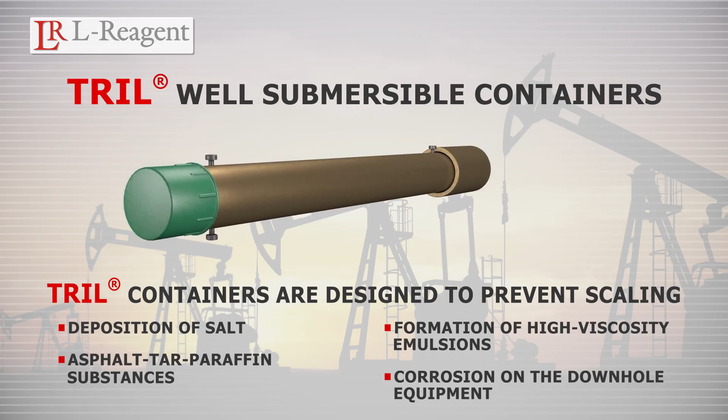Our products are Tril well submersible containers with inhibitors for treating oil wells. Tril containers are designed to prevent scaling, deposition of salt, asphalt, tar, paraffin substances, formation of high viscosity emulsions, and corrosion on the downhole equipment of producing oil wells in the process of oil production.

The Tril well submersible container is a device that performs efficient inhibitor dosing at required concentration for eliminating problems in oil wells. The Tril container is a universal device that can operate in wells with any operational parameters.

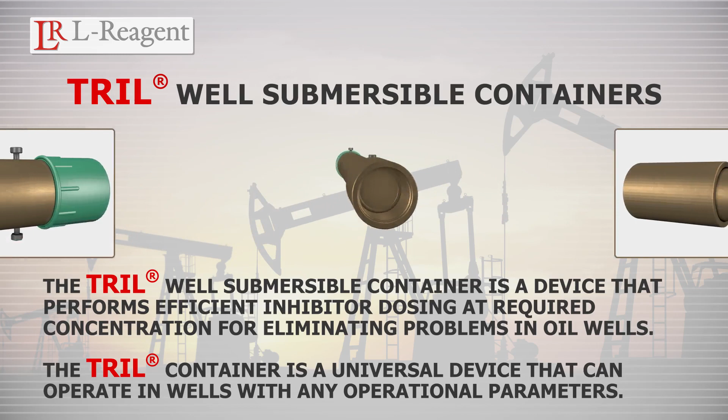A distinctive feature of its design is that container sections are equipped with a dosing adjustment mechanism, which allows you to customize it individually for parameters of a well within 10 minutes prior to running down the hole at workovers.

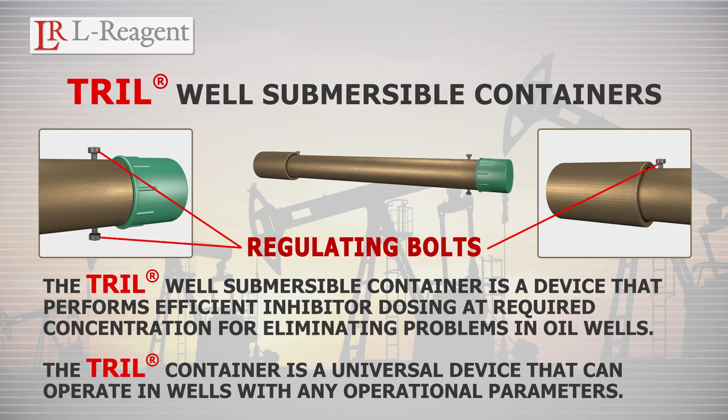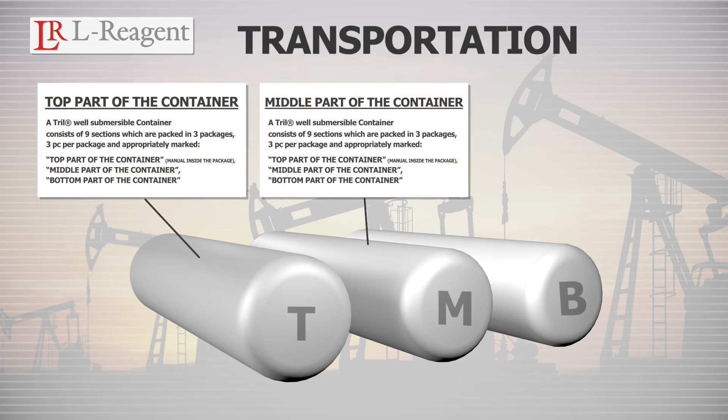Transportation. One Tril container is placed in 3 packages. Each package is appropriately marked: top part of the container, middle part of the container, and bottom part of the container. The operational manual is placed in the package with the top part of the container.

The weight of the package is approximately 60-65 kilograms, or 133-143 pounds. Each package contains 3 sections of the container. One whole container consists of 9 sections.

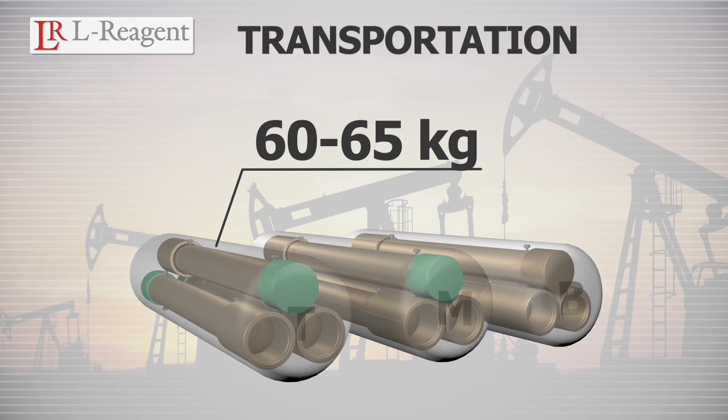For the convenience of transportation and loading and unloading, Tril containers are delivered on pallets. Up to 5 containers may be placed on one pallet, or up to 15 packages.

Order of assembly. The container is delivered disassembled in 9 sections. The sections are filled in with inhibitor. The container is assembled directly on the well side, starting from the bottom section and all the way up to

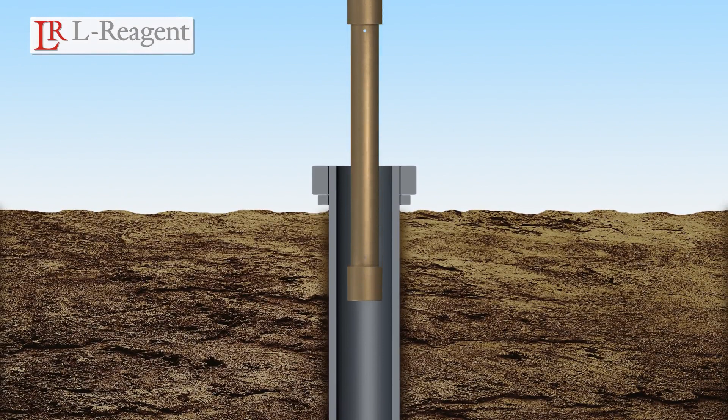the top section of the container as it runs down the hole, the same as a standard tubing string. Distinctive feature: the bottom section of the container is equipped with a blind plug and must be assembled first.

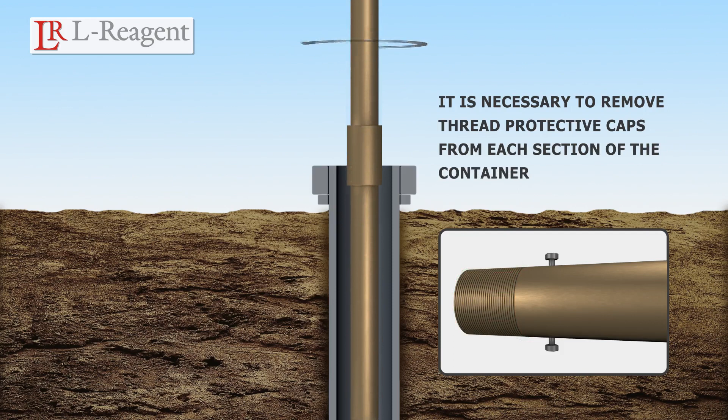When assembling, it is necessary to remove thread protective caps from each section of the container and, if necessary, remove dosing adjustment M10 bolts, according to table number 1 in the operational manual.

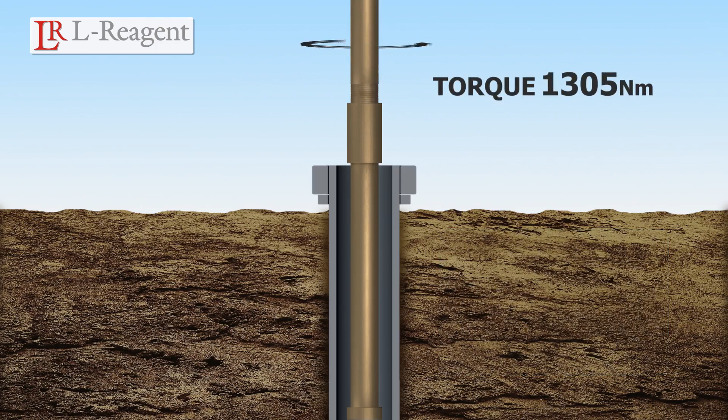Sections of the container and the blind plug should be torqued to 1,305 Newton meters.

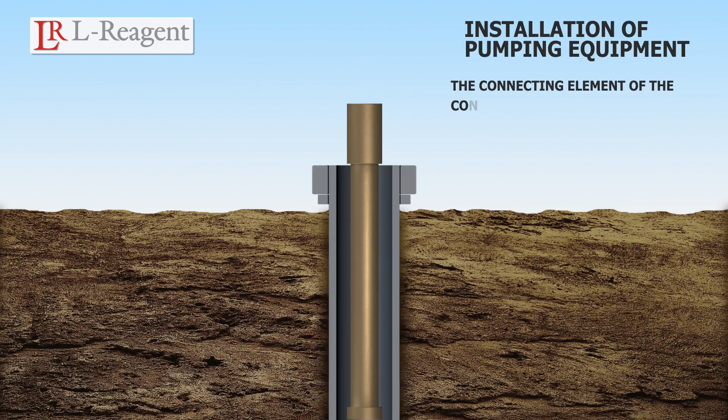As soon as the container has been assembled, then the pumping equipment is attached to it. The connecting element of the container to the pumping equipment is the top collar of the container, tubing collar 73.

Installation of pumping equipment to the top collar of the container is conducted in the following ways: for an SRP pump, by means of a special filter or perforating tubing nipple 73.

For assembly of a tubing string equipped with an ESP, the installation of a submersible electric motor is performed mainly with the tubing sub N60X73.

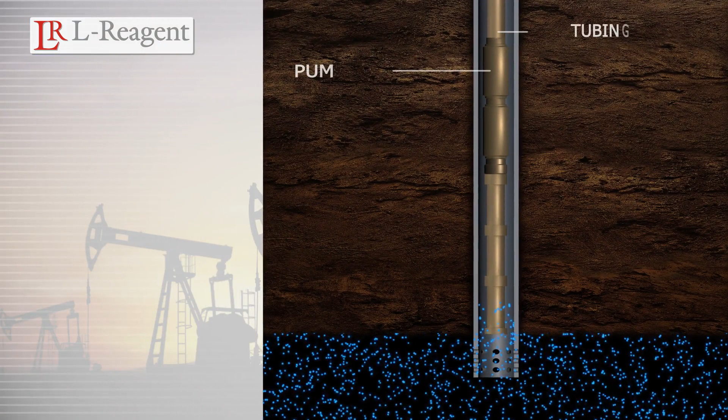After the equipment is installed and the well is put into operation, the produced fluid begins to wash the container from the outside and partially penetrates into it, dissolving the inhibitor and releasing it or its saturated solution out of the container. That is, self-dosing of the inhibitor occurs.

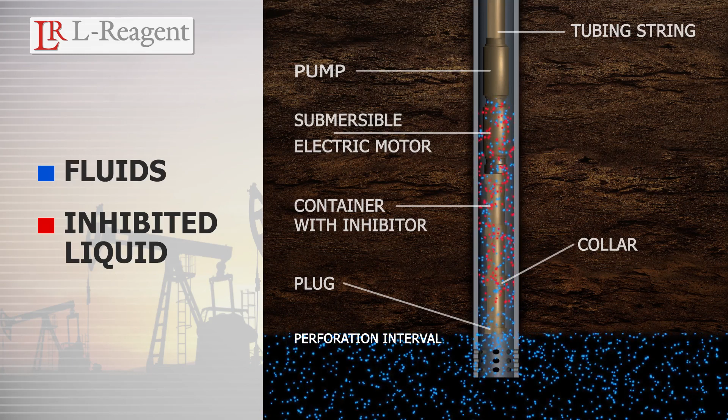Thus, the inhibitor is fed directly to the location of the problem, performing along the whole technological chain of oil production. It is effective in wells with any parameters and can be used to protect surface pipelines.

High effectiveness in protecting ESPs when putting wells into operation after drilling and completion or hydrofracking. For this purpose, it is sufficient to use only several sections from the total number of sections of the container.

The method is quite cheap to deal with scaling, corrosion, and salt and paraffin depositions in oil wells. The 1.5–1.8 meter sections are easily transported, may be carried manually, and do not require additional lifting mechanisms.

Any additional maintenance is not required during the period of operation, which is especially important in hard-to-reach places and remote locations, in wintertime and during seasons of bad roads.